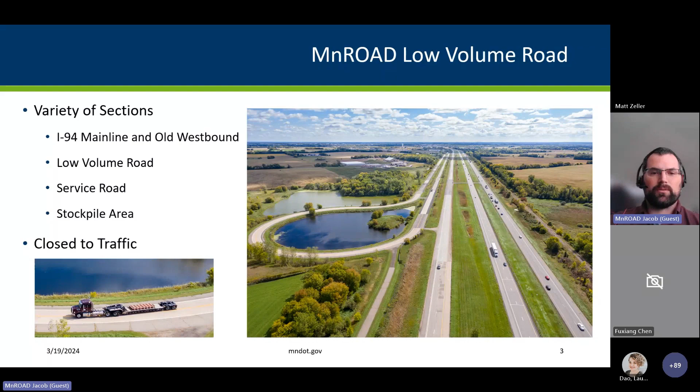The low volume road is trafficked by a single truck, while mainline and old westbound is subject to I-94 traffic. So in order to close it down whenever a participant would show up, we chose the low volume road. Some of the participants could collect while the truck was driving, and some of them preferred that the truck was not doing laps.

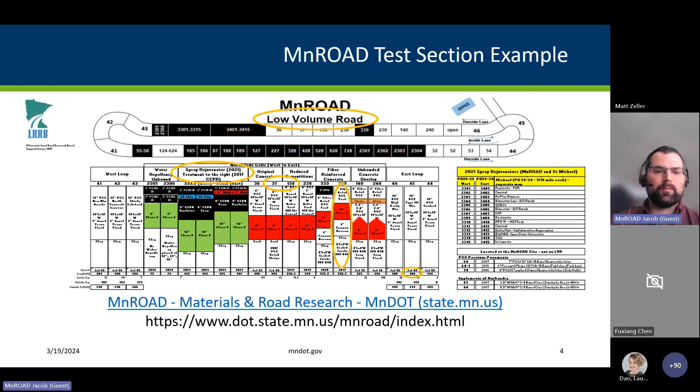Just to give you an example of the test sections that I refer to at MnROAD, the MnROAD website has these section maps available that will show the roadway, the research study, the section number or cell number, the design thickness for that cell, the installation date or modification date, and the length of the cell. And all of this is available at the link below, or if you search MnROAD test sections.

You can also see the test sections here at MnROAD. They are available on our YouTube channel, if you look for the tag at MnROAD Research. We have several years of videos archived, and we'll continue to add more annually and biannually, depending on the test sections.

We do collect manual distress surveys, which we kind of draw out on these manual distress maps. And while last month's Research Pays Off discussed a lot of the data collection that is performed at MnROAD, this time we're going to go into more detail on these manual distress maps and the rest of the automated distress collection that is performed here.

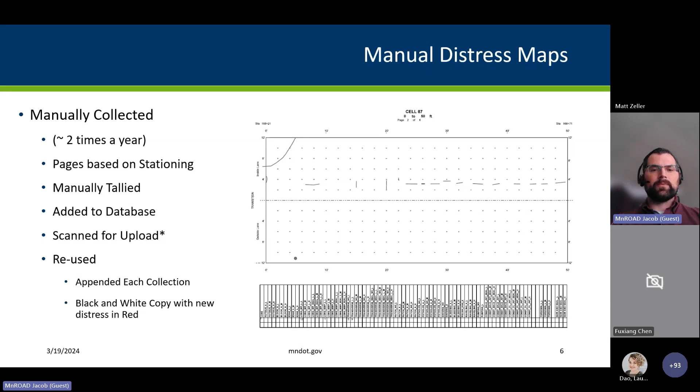But basically, we have people taking a lot of time walking and rewalking these sections to identify any new distress that then gets appended onto the old tally. The tallies on some of these sheets are added to the bottom. And when I mention these tallies and database, this is the list of database entries.

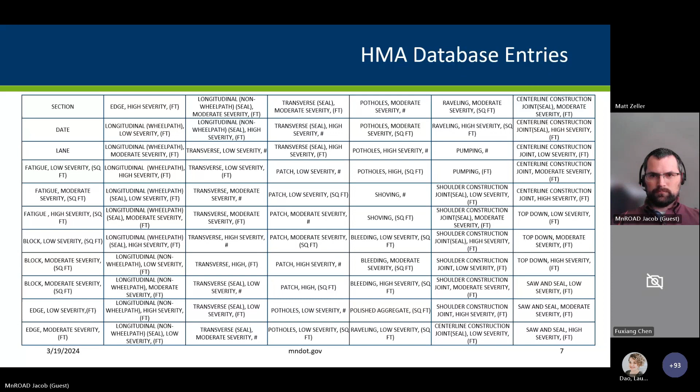In this case, it is the HMA database entries, where it covers the different types of distresses that we see, the levels and severities of those distresses, and tabulates them by either their number, area, or length, and sometimes both. We do separate out our sections based off of lane, so there is an indication as to which lane the collection is taking place. We have a similar database for PCC, or Portland cement concrete sections.

Additionally, we do collect automated distress. MnROAD has some experience with automated pavement distress surveys. MnROAD operates one of the same vans that's used by MnDOT Pavement Management, that they use to rate all of the state and local highways throughout Minnesota. And as pavement management replaces vehicles in their fleet, we're given the option to possibly upgrade our van by receiving one of their retired vehicles.

MnROAD then uses these vans primarily to collect ride and rutting information that is added to our database. In addition to adding this to our database, it allows us to collect data the same way that pavement management is producing data, and we are able to analyze it in similar methods to hopefully get a correlation. Previously, the vans had macro texture lasers, and it's no longer included on our current van. We primarily use these vans to collect ride and rutting information that is also added to our database.

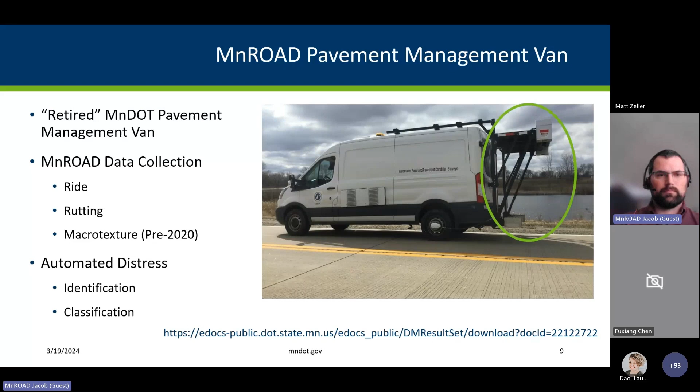After collection, the data processor is able to use the forward-facing perspective camera, the angled shoulder-facing camera, as well as GPS coordinates to determine the location of the van in the collection. The van also measures distance while in motion to provide stationing. The lower lasers on the van calculate the ride for both wheel paths, and the upper lasers and 3D camera provide line scans that can produce these transverse and longitudinal profile information.

For distress identification, we're most interested in the center of this data array that shows the 3D laser scans. A 3D camera collects the intensity of reflected laser and the length of the time the laser traveled. This timing can be used to calculate the height of the roadway at that laser point. These scans can then also be used to identify distress in the pavement.

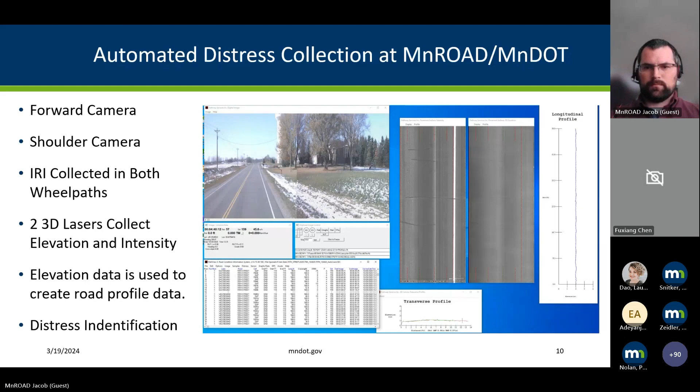There we go. So when you focus on that intensity and height line scans, the changes in intensity allow us to see the changes in the pavement surface. Most notably, the paint lines can be seen, and here the sealed cracks as shown in this image. Distress data is then identified by software and further classified into distress boxes shown above. And you can turn on and off the distress boxes.

So in this image of height, I have added the distress boxes. In there, you can see the pink distress that's inside some of those boxes, and then the classification gets color coded. And here it's blue and green for transverse and longitudinal. It will also change the severity as well.

And at this point, I want to give a resolution disclaimer that will cover all of the previous and additional slides. The resolution that is produced by this particular software, as well as the software from our Rodeo participants, is not possible to reproduce for an online presentation. For instance, the scans shown above are set to display 50 feet of pavement to match our distress surveys.

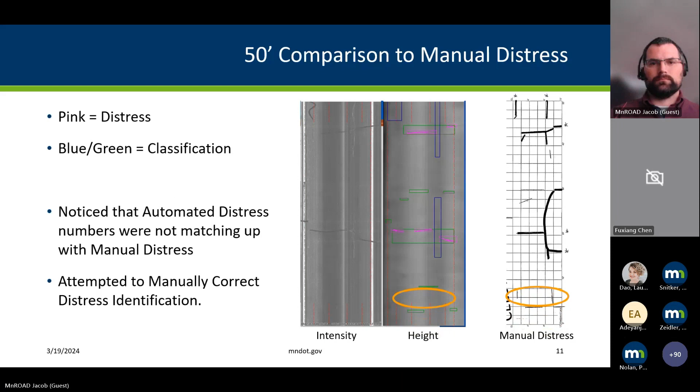It's worth noting that we also have issues with resolution on our manual distress maps as well. As I previously mentioned, we were creating a copy of a copy, and occasionally the maps would need to be updated in order to clean up that created noise. But even as such, we could still end up with some pretty messy outcomes.

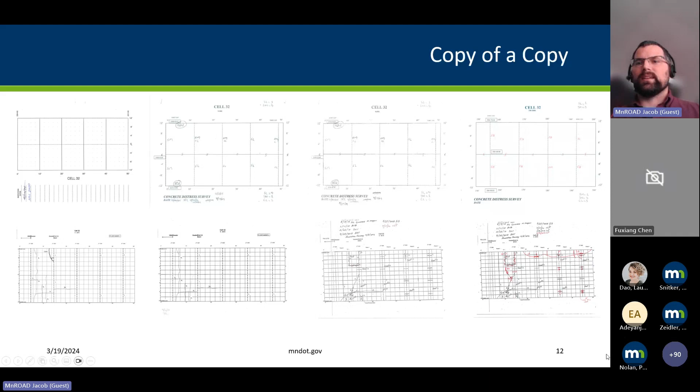This worked well for the person rating the cell because they were able to kind of read their own handwriting, and were able to create the tallies, but they don't present well to an outside audience. So if someone is asking us for distress surveys, we'd like to get things cleaned up a little bit more on our end as well. So we saw a need for improvements in both our manual and automated distress technologies.

So we were trying to look at how can new technologies be utilized to improve or replace manual distress surveys. Looking to focus on field data collection and data processing, where MnROAD would supply the test sections, a distress data format, and an online platform for participants to share data. MnROAD would provide a summary of the different collection methods with the goal of providing details that would allow future users to decide which techniques would be most suited to their needs.

This is where again, I have to be careful when I say improving or making things better, in that for some people, their need may be along our lines where we're looking at research. So those minor cracks are very important for us to keep a full picture of what's going on in the pavements. But when you're trying to collect the entire state and you need to process all of this data in a timely fashion, you may not be interested in seeing all of the small cracks.

So depending on what you're looking at, you may believe one thing is better than another. So we aren't really trying to say which one is better, but just say kind of the differences that we noticed in these techniques.

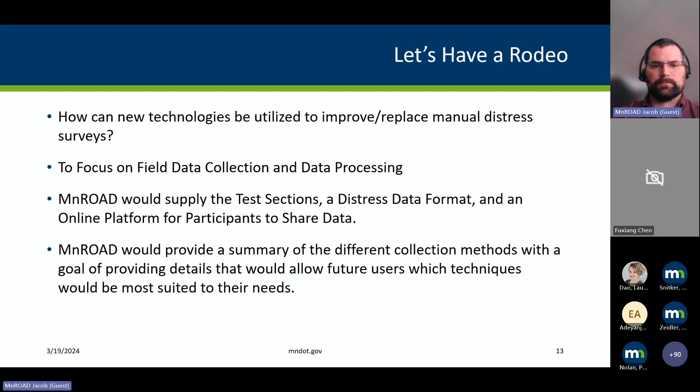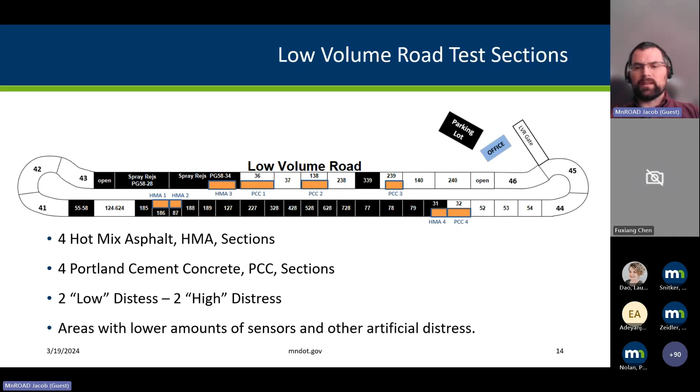So 8 sections were chosen from the low volume road, 4 hot mix asphalt or HMA sections, and 4 Portland cement concrete or PCC sections. Each of these 4 sections would have 2 relatively low distress and 2 relatively high amounts of distress. Additionally, sections would be chosen or truncated to allow for lower amounts of sensors, forensic core holes, and other artificial distresses that can be caused on research sections. One lane was chosen and is highlighted in the graph above.

Our distress surveys generally include both lanes, but for the next slides, I've trimmed them down to the lane that was used for the rodeo, and included blue arrows to show the direction of traffic. Just to give you a quick overview of these sections. And to assist in collection, you'll notice that we do have 2-foot grid line squares included. Crosshairs were used to prevent that, if you saw on the previous slides, the grid lines that we try and use tend to darken over time as we scan and rescan. Stationing is included at the top or bottom of the drawing, with a scale of every 10 feet.

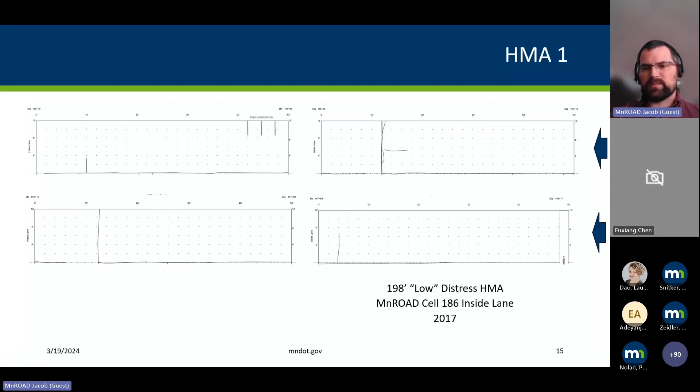This is HMA1, which is 198 feet of low distress HMA that was installed in 2017. HMA2 has a higher amount of distress. That was 225 feet of hot mix asphalt that was installed in 2008. And here's where we can start to see some of that fine cracking that we're looking for with the fatigue cracking and raveling.

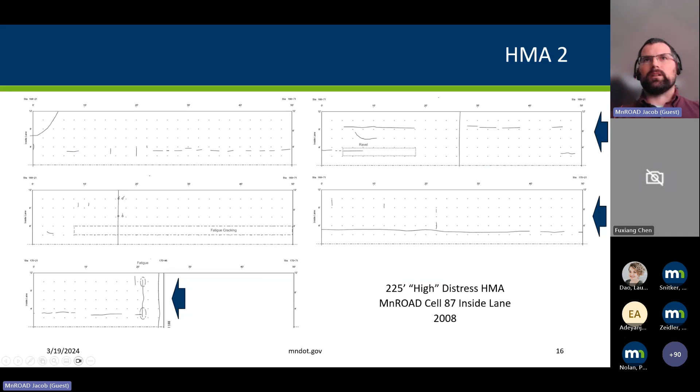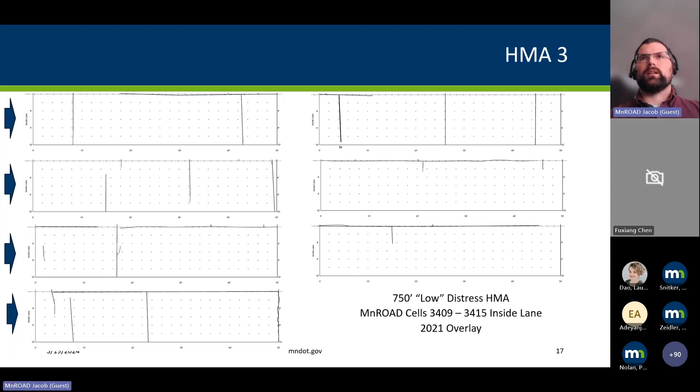HMA3 was another low distress HMA where this was a 2021 overlay. Most of the distress we're seeing is just reflective cracking. HMA4 is a high distress cell, 300 feet of highly distressed HMA that was actually replaced at the end of last year, due more to the inside lane, which is the more trafficked lane, really needed to be replaced.

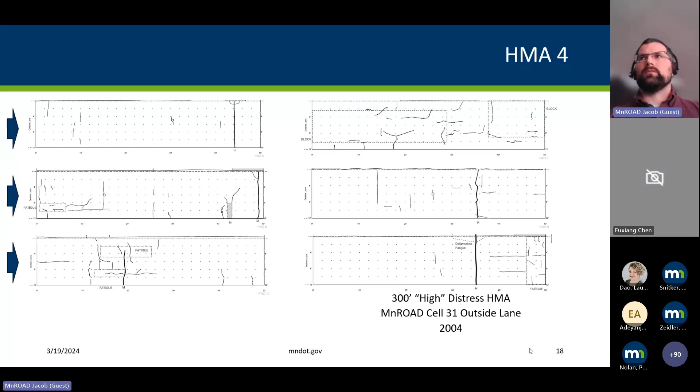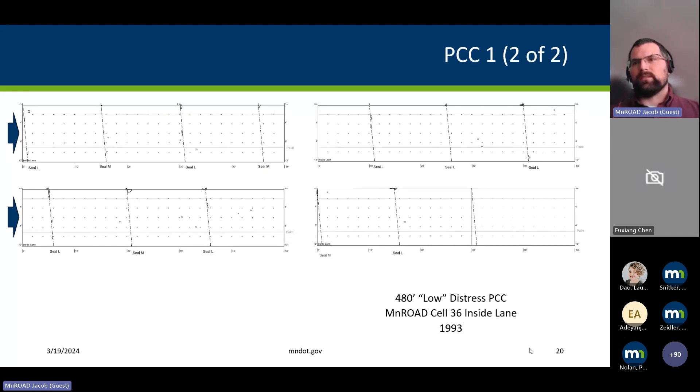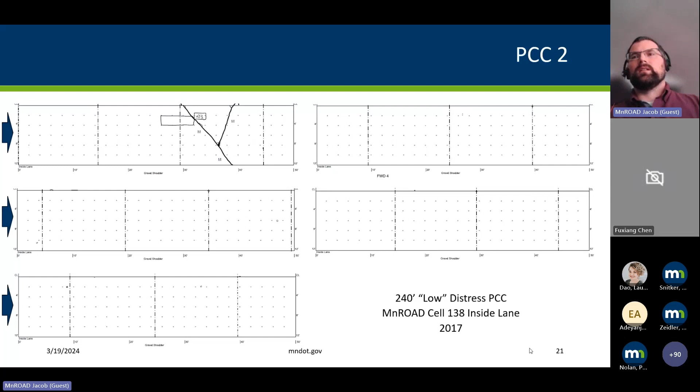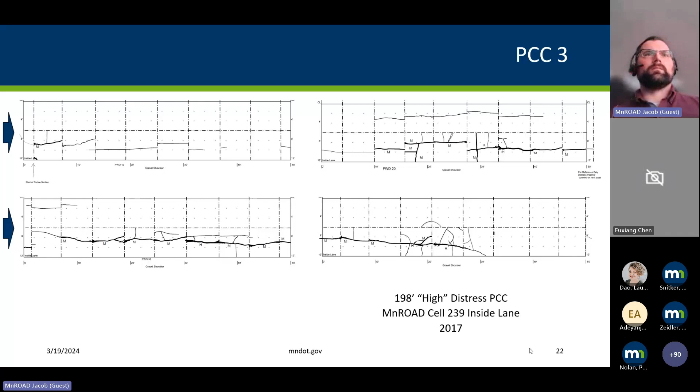PCC1, this is just one of 2. Again, there's 50-foot sections, so we need a lot more distress pages for 480 feet of kind of a low distress PCC, which was installed in 1993. PCC2 was 240 feet of low distressed PCC, installed in 2017. PCC3, 198 feet of more highly distressed concrete, installed in 2017. And PCC4 is more highly distressed concrete installed in 2000.

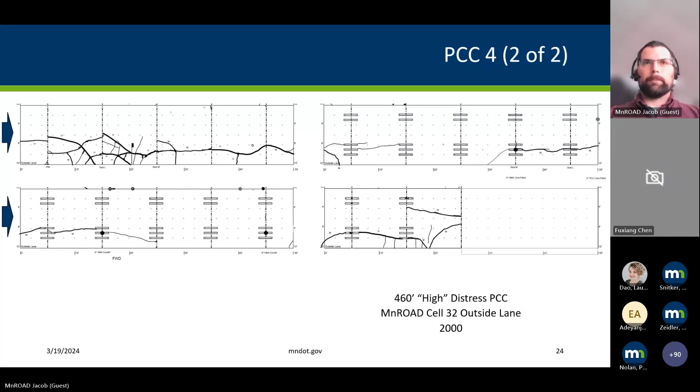And you may notice, especially in PCC1 and PCC4, that there's a significant amount of sensors and forensic cores that had been added over time. And while we tried to avoid this as much as possible, they're very common features at MnROAD, and it's almost impossible to entirely avoid a lot of these additional adaptations that have been made over time.

So the participants for the rodeo, we were from MnROAD, we were going to include the manual distress maps that we have created. We would provide collections from our MnROAD high-speed profiler. I say Pathway Services is the van that created that. They produced the software, but it was all internal processing that was done of both the collection and the data. MnDOT Aeronautics agreed to bring out their drone and do a LiDAR collection. We had Terracon and Pave AI come out and try out their equipment.

Transconomy, and we had saved data from the Australian Road Research Board's Intelligent Pavement Assessment Vehicle. They did not participate in the rodeo, but we were able to kind of go back and spot check some of their stuff. Unfortunately, we were unable to work out the timing for automated drone flights. We were hoping to get some collection done there, but it didn't quite work out with our schedule and the participant schedule. We attempted to make our own collections with a GoPro and a newer 3D collection system from Pathway Services, but we weren't successful in those efforts.

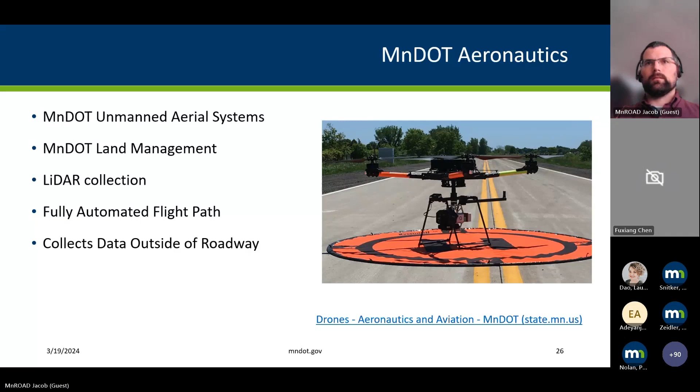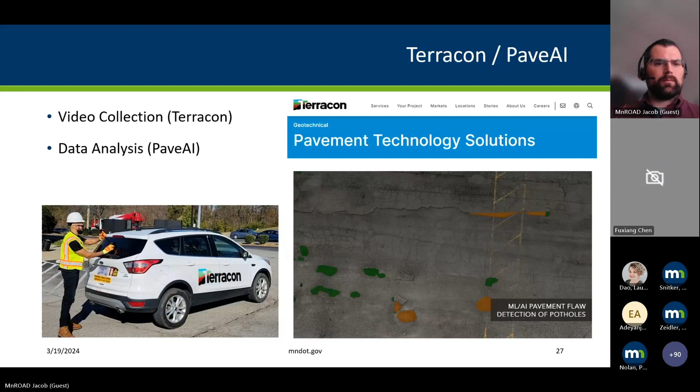Put it this way. Terracon, Pave AI, their video collection is basically a unit hooked up to an SUV really and is connected to Pave AI, where they're able to upload the data from the vehicle, from a cell phone in the vehicle to Pave AI. Pave AI performs the data analysis.

Transconomy, similar SUV vehicle where they're collecting data from video devices on the front and back, and it looks like a 360 camera on the top of the vehicle. Transconomy, if you go to their website, it appears they do a lot more with some of the pavement management and asset management. So a lot of the times these vehicles are used to collect information on road signs and things on the shoulder, but they are using their machine learning computer vision technology to test out what they can do on pavements.

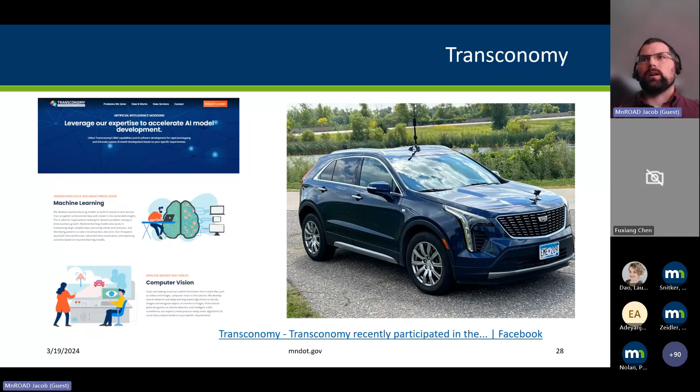As I mentioned, ARRB's traffic speed deflectometer was out here in 2019 and 2020. Their data was still accessible on Hawkeye Insight. And so we were able to look at some of the older distress maps that we had and kind of just do a quick comparison. This is predominantly used for state road authorities and has been used on some government networks too.

This unit that you see here, iPAV vehicles can also be used to measure roughness, texture, rutting, digital imagery for visual rating, and automated cracking. So this is one of the larger units primarily used as a traffic speed deflectometer that they've added all these additional things onto.

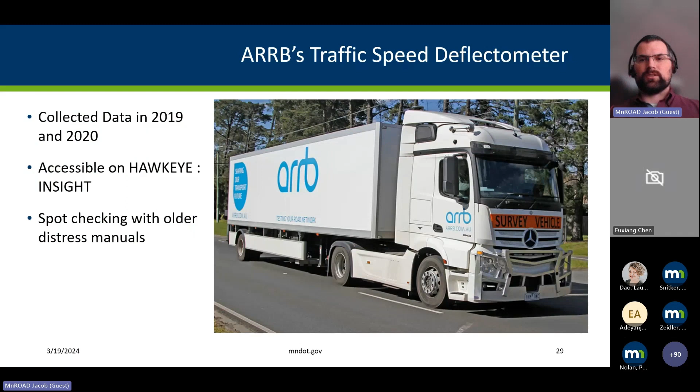So getting into some of the information that was produced, unfortunately, with MnDOT Aeronautics, our first data collection was not performed at the highest resolution. It was probably a miscommunication on my part, where this is new to them. They do a very minimal amount of roadway distress collection. So for them, this was as much of a learning experience as it was for us. And so they could have performed the distress, but they really wanted to get a higher resolution imaging.

So data was recollected in December, and we still need to work on processing that. We hope to get that processed just to see how their algorithm works and then to see whether we can make that data available to others in the future.

They were able to provide us TIFF files that can be brought into Google Earth. And so that's one of the ones that you see here, where they're able to give us these resolution photos. And again, because of the resolution, I'm not certain how high resolution it can get. You can see some of the cracks if you kind of zoom in on that overlay, but we're really going to focus on narrowing that down to see how high of resolution we can get.

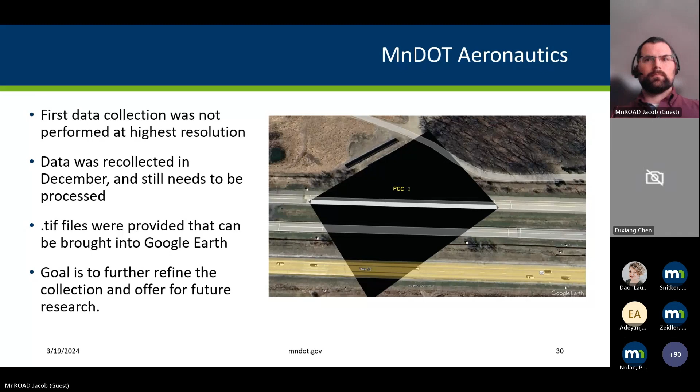Again, Pave AI. They actually came out here 3 different collection dates. They did a full loop back in late 2022 just to demo their product and process, and we invited them to come back and participate in the rodeo. And we were hoping to get kind of 2 different collections from each of the providers just to see how repeatable their process was, but that didn't always happen. But Terracon was great to provide us with at least one section that was repeated twice.

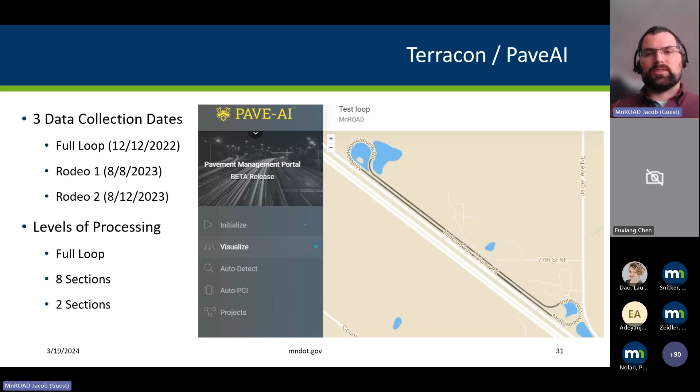And so in those different data collections, there was a different level of processing. The first time they processed the entire loop. Second time they only processed those eight sections for the rodeo, and the third time around they just did 2 sections just to show the repeatability.

Now, generally, this product is marketed at a project level. It's used primarily, my understanding, by Terracon for parking lots, where they are producing a pavement condition index that they can then visually display over these orthomosaics. It's not currently set up to output database entries, and they are currently including some manual identification in the process.

They were basically pitching this as a possibility for us to explore. This isn't their normal market. They aren't normally doing roadways, but they were very generous to try out their product and kind of show us what they could do as far as presentation and identification. However, because that gave things in a PCI rating, or a pavement condition index, we weren't able to really compare that as well to our database entries.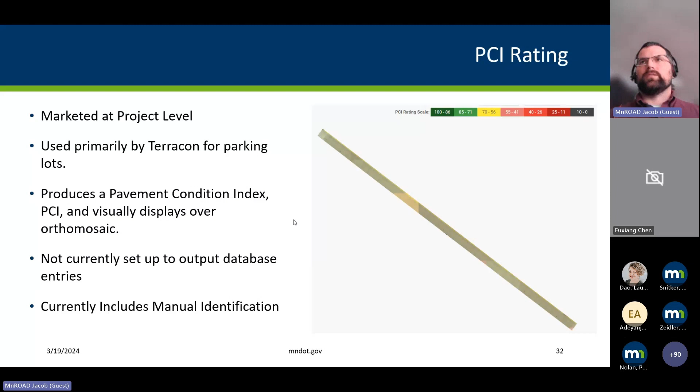So this was a learning process for me where I basically looked at how, like I said, pavement management van were able to somewhat reproduce what pavement management produces. And I say somewhat, so this is not entirely what pavement management does. They produce a lot of things, and I'm only touching on one.

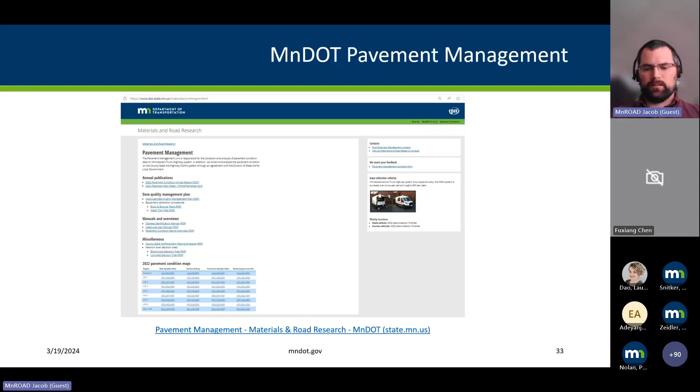But one of the things that they do, and you can see the rest of what they do on this link here, is produce a surface rating, where they're looking at the distresses measured. They're taking those distresses, weighting them by multiplying by a weighting factor, adding it all together, and then using this calculation to perform a surface rating.

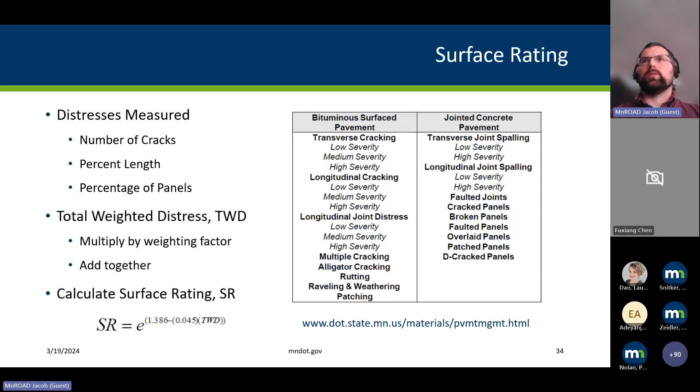And then I added our surface rating that we can approximate from our manual distress data. We can only approximate it because we don't do all of the measurements specifically. We aren't out there calculating rutting, but we can enter in what we have. There's also a few changes in how they calculate things where for concrete they're using number of panels, and so getting percentages based off of that, which isn't always something we have in our database, but we can go back and relook.

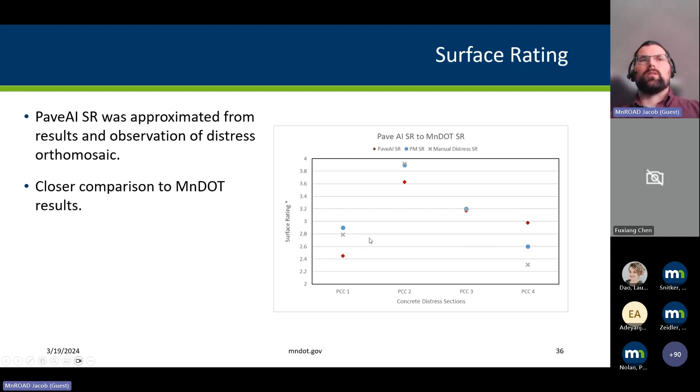And because they are calculated, basically that PCI rating, or actually the surface rating, was highly weighted towards spalling. And so when we put PAVE AI's information and again get that similar approximation, we're able to reweight that spalling, and you can kind of see that PAVE AI was able to more closely match the MnDOT results.

One thing I forgot to mention on this slide was we were happy with PAVE AI, where they were able to get the trends, where we kind of expected to see higher PCI ratings for HMA 1 and/or 2 and 3, and lower PCI ratings for PCC 3 and 4. What kind of surprised us was that low rating for PCC 1, which occurred in our surface rating, but did not occur in their pavement condition index.

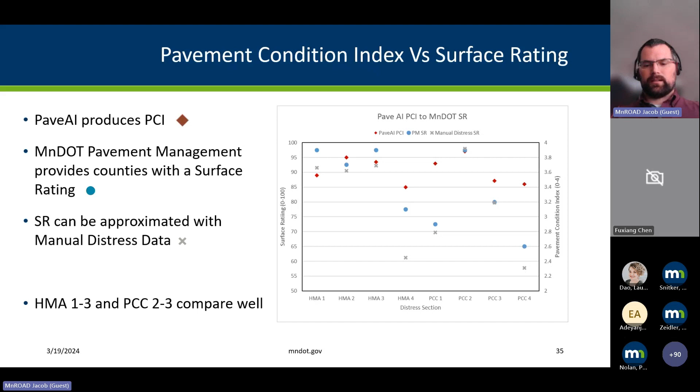And we're kind of wondering that HMA 4 had a little bit of difficulty. We wanted to look into that a little bit more closely. So after looking at the surface rating, we did look into some of the presentation, and as you saw before, PAVE AI was able to present this data really well. You saw the orthomosaic that included the entire low volume road. And in that, you're able to zoom in.

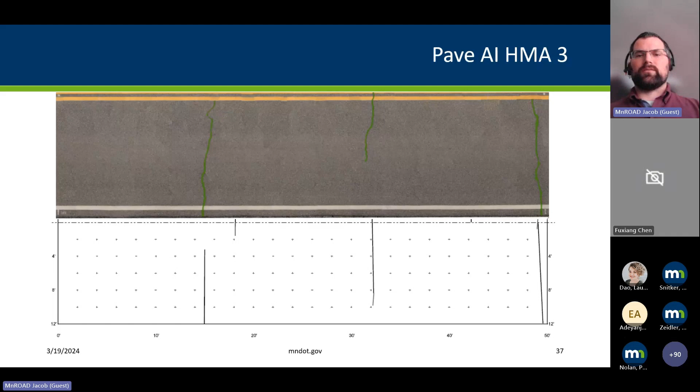So here you're able to kind of see and zoom in, and you're able to see the distresses that they labeled. And some places they had a little bit of discrepancies between what they labeled and what we labeled. But in some cases the presentation is better than our distress surveys, or more true to the actual crack than our distress surveys, which is kind of shown here for HMA3.

However, when they did their collection, the road was definitely dirtier, and so that also can affect how our van will be able to collect the data. And so we do get some days where we're able to see more cracks than others. As it turns out, in discussions with PAVE AI, on this particular collection day they had an issue with one of the passes. They do multiple passes on the roadway, and the one on the shoulder had a little bit of difficulty, and so they weren't able to get as high of resolution as they wished. So that was one other issue that they had.

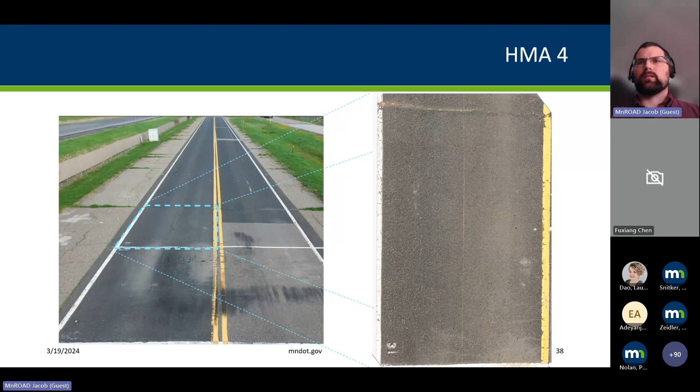And so here I just show you those collection conditions, between adding a second run and just having a better day to collect. The collection on the right, you can see it would be a great day for doing manual distress surveys because there was some moisture inside of the road, but not on the surface. And so a lot of those cracks really pop out. And in addition, PAVE AI had an additional scan on here, so they were able to produce higher resolution images. That being said, I think if they had rated HMA4 on their second collection instead of their first collection, they would have had a closer outcome.

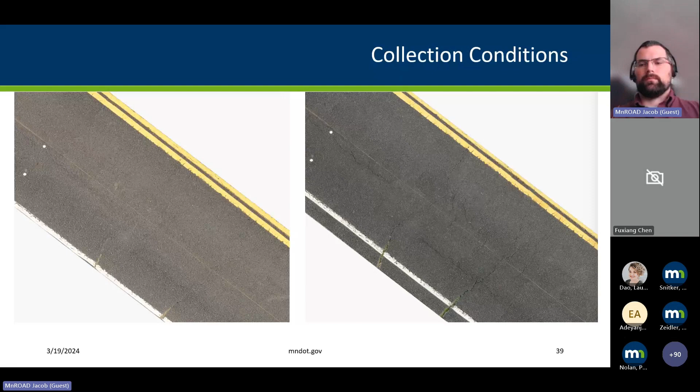Just again to highlight some of the benefits of their system compared to our manual distress maps. Here you can see the highlighted distresses, and you can see kind of my drawing down at the bottom. And some of their cracks show a truer representation of the cracks. What they also do well is it's a photograph, so you're able to see those paint numbers that we put on the roadway, and they did a very good job of not picking those up as noise.

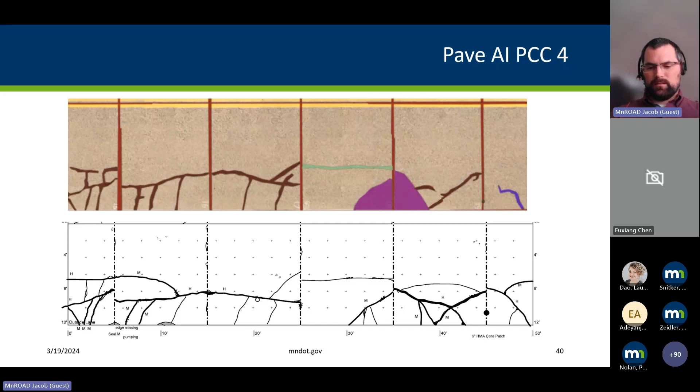Sometimes the automated distress systems can pick up those additional markings we have on the road and try and classify them as distress, which is another reason why we wanted to do this rodeo, was to improve that technology. You can see there's a few things where some of their joints, the stitching of the orthomosaic, again, probably will be improved in the future, but we're very happy with the steps that they're making in that regard.

Moving on to Transconomy, again, they had another similar vehicle with the videos on the front and the back. I was not able to see their distress output other than they very kindly sent us their database. So in this case, I was able to make more of a comparison between the two.

And here, just rather than going into all of the details with the numbers, because I still need to work with these a little bit more myself, you can really see that there's lower detection in these distress sections 1 and 3. So when I kind of remove most of the null, you can just see there are more detections in 2 and 4, fewer detections in 1 and 3, and you can kind of start to compare those numbers.

They compare very well to the pavement management van and the manual distress survey. So here you can see Transconomy on the left, the pavement management van is in the middle, and manual is to the right for all four of the HMA sections.

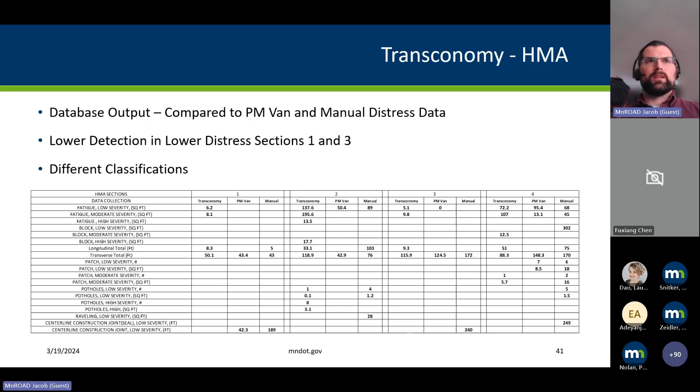A few things that we did notice, that Transconomy and our pavement management van had, and honestly, we had some discussion with our manual distress surveys, is when we are only rating one side of the road, what happens to the center line joint. And so here you can see the picture when that center line joint is on the right hand side of the road, and we're rating the left hand side of the road. Where do those distresses count?

And so this can be one of the things that really kind of needs to be solved with firm distinctions in where you are rating, and how you are rating, which is some of the discussions we will have. But then also distresses can be missed. If that line detection is picking up the edge of the cell on the inside of the line, you may never see those joints.

Wheel wander. If the vehicle moves over too far, it won't pick up those center line joints, and also it can be masked by cracked paint. They aren't always easy to see, especially at low severity, which is again one of the things we're trying to pick up, really these low severity cracks that may or may not be an issue, but we want to be able to count them.

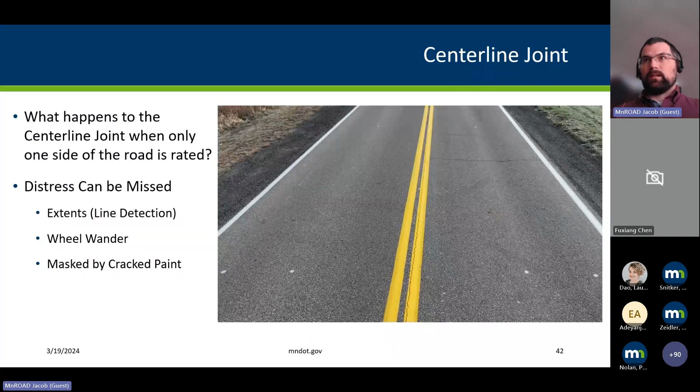And so I was able to graph a little bit of the results. So here you see Transconomy, where I was graphing the number of cracks with the length of cracks and really comparing their sections with the manual distress surveys. And there's a few discrepancies we can kind of see in PCC sections 1 and 2, which may have been more of a classification thing where I classified these small cracks as block cracking, and they appear to have labeled them as longitudinal cracks.

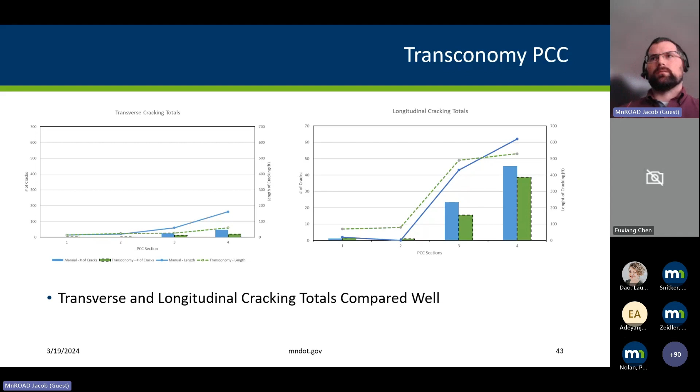Again, here we see where I removed the null just to show the quality rather than quantification, I guess, where you're really looking at here's the low distress, and you definitely see it's picking up a lot less distress than the higher distress sections.

One of the things we noticed, skipping ahead a little bit, pop outs, where these automated distress systems, this is one of the things where we can say, hey, these things are much better at identifying and quantifying, because as you can see there are 219 pop outs, where we just don't have the time to count all the pop outs. So for me, I would just say, hey, there's 8 panels with pop outs in them, but they're able to actually pick out a lot of those pop outs, where I can't even, well, I could, if I spent a lot of time, kind of check their math on that.

Still, some of the issues we're seeing are these transverse joint seals, with both the van and Transconomy. I think Pave AI as well, where maybe the sections need to be labeled better, whether they're sealed or not sealed, but we are having some difficulty picking up those. I know when I'm adjusting them, it's really difficult to see on the screen where seals are having distress. Transverse spalling, also one of the issues that we're looking at hopefully improving in the future.

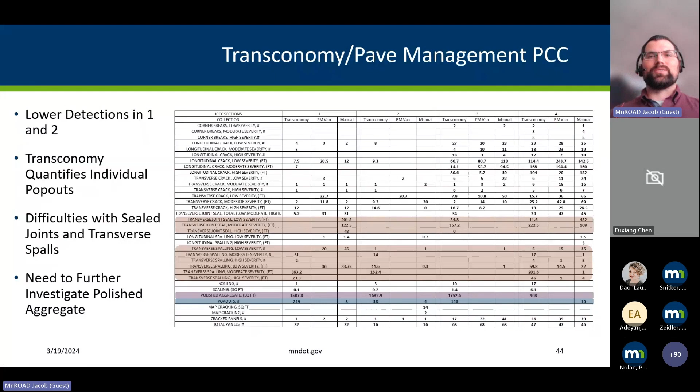And they were able to pick up a lot more polished aggregate, which I still need to further investigate. I know PCC4 had been ground, and so there was a lot of exposed aggregate, but I'm not certain that there was the traditional polished aggregate. But definitely they're picking up on that a lot better than I did with my manual distress survey. So that's one of the things I still need to check into.

Here we'll just give you a quick overview of ARRB's traffic speed deflectometer. Again, wonderful presentation of the data, where here you can see the Hawkeye Insight web portal allows you to see the vehicle's location, the different camera angles, and the cracking data. Very similar to what we're seeing with the Pathway van.

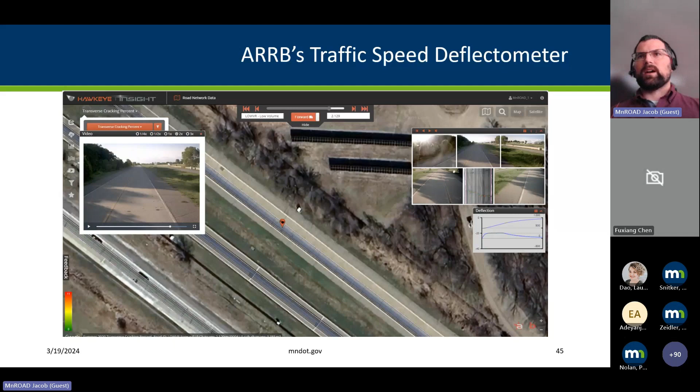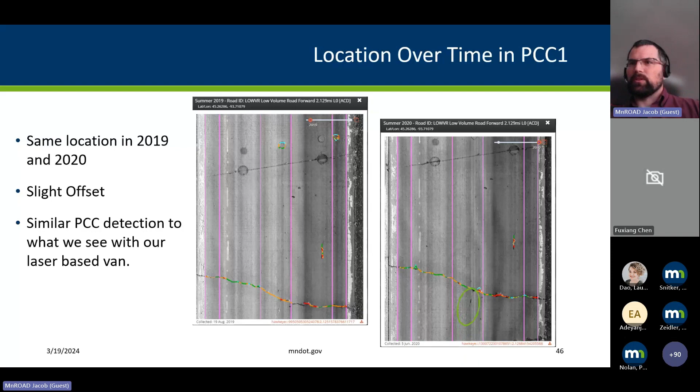What's great about this is you're able to move that slider seen on the previous screen, and it shows the cracking data at those points. And then you're able to move this little slider up at the top that allows you to pick the different dates of collection, very similar to Google Earth. There's slight offset, again, very similar to Google Earth, but you're able to see the kind of crack propagation over time. And, at least in my opinion, I'm seeing very similar detection to what we get with our van. Again, we're trying to pick up those low severity cracks.

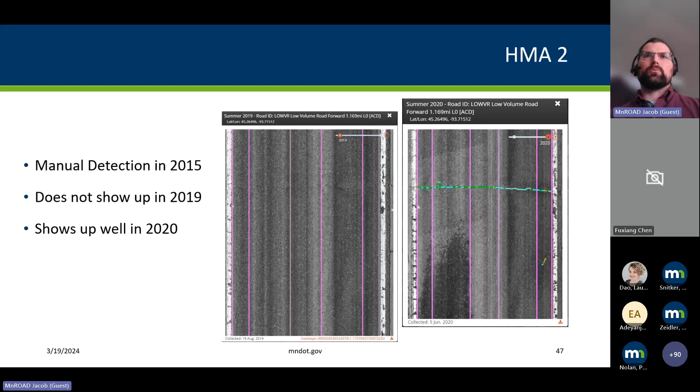Again, just to show you HMA2, trying to improve that crack detection here. We had a crack that we found in our manual distress surveys in 2015. Here it didn't show up in 2019, but they definitely picked it up in 2020.

So just to summarize, manual distress surveys are still the standard that we're going to go off of. However, very good results can be obtained with a variety of collection devices. I mean, you can see this scaled from a

You got muted somehow. All right. There we go. Okay, good. We're back. All right. Now I gotta get my presentation back up.

All right. So, yeah, good results can be had for a variety of costs and effort. And what we see, I didn't describe this much in the presentation, but automation does provide a safer and faster alternative. It is a lot safer to be looking at these cracks from your computer screen than from out on the road. Digital results provide a truer representation, as shown again on the right, where you really see what the crack is as opposed to somebody's rendition of it.

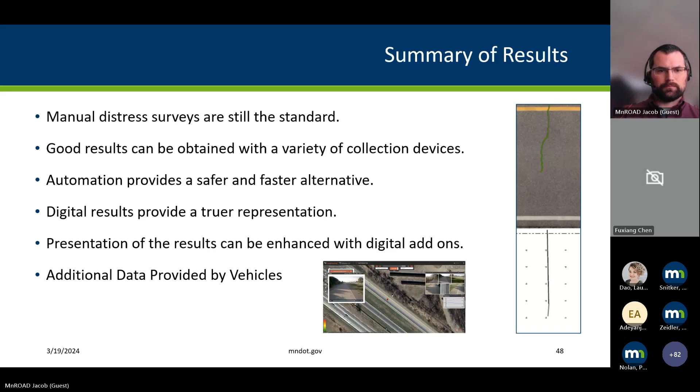Future goals. Again, we're trying to help out wherever we can to improve this resolution, as you can see from the photos on the right. But we're also trying to learn. So how do we tailor our MnROAD data collection? As I mentioned, we're working with aeronautics. How do we produce LiDAR data that other people can use? One of the goals of the distress survey was to get people who just wanted to process the data, not collect it. We didn't have anyone participate in that.

We have had since then requests to use some of the data for similar operations, but our data isn't tailored to their needs. So we're really looking for people who want to process this data to give us advice or to ask us, hey, can you have your drone or your vehicle or your GoPro do this, so that we can produce that data, save that data, and share it with whoever wants to use it.

We do want to try and work on this automated drone collection, so we can have that capability to really do more of the project level, so the smaller areas, higher resolution. We're working on that LiDAR collection and processing. And again, as I said, increased participation. So we'd love people to come and help us out, and allow us to help them wherever we can.

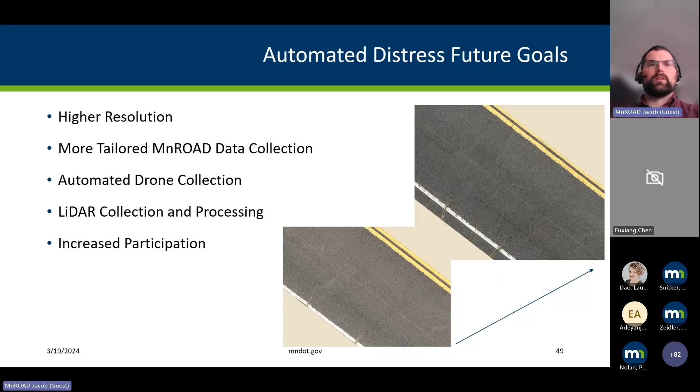Where we see some of the future possibilities is this possibility of quantity over quality, where lower cost, more vehicles, where you might not be getting as great of data, but you are getting more data. This is also kind of decoupling some of the data. So right now we're using a pavement management vehicle that works great for doing the things that pavement management needs it to do, in addition to doing distress surveys.

And so we're wondering if we decouple that, can we get a vehicle that's lower cost, that doesn't need to do all of the pavement management stuff, that can just do distress. And here is just an example of connected vehicles where they're using fleet vehicles, or in some places people are trying to use phone data to really crowdsource ride data.

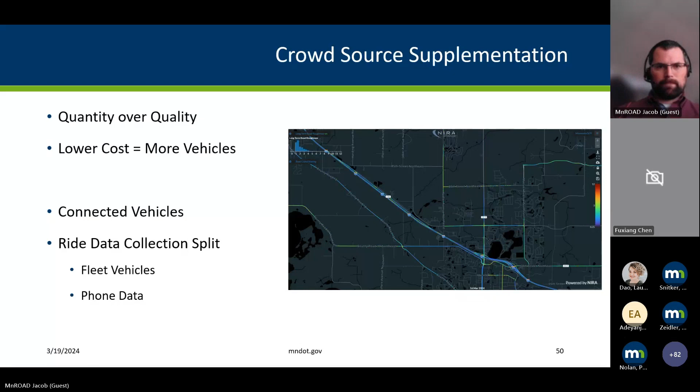And so, in addition to crowdsourcing, there's this cloud sourcing idea, where you're moving from PC computing to cloud computing. One of the nice things about our pathway software is that it fits on a program that we can share with people, so researchers can look at our data from a laptop.

However, as can be attested by Pave AI and Transconomy, they're moving more to these machine learning and AI programs that are able to bring a lot more computing power to this identification. And we really see that as a way to further improve these systems, especially if you're able to collect more data from more vehicles and get it into the hands of these larger computers. So in this case, you'd have more specialized computers than specialized vehicles.

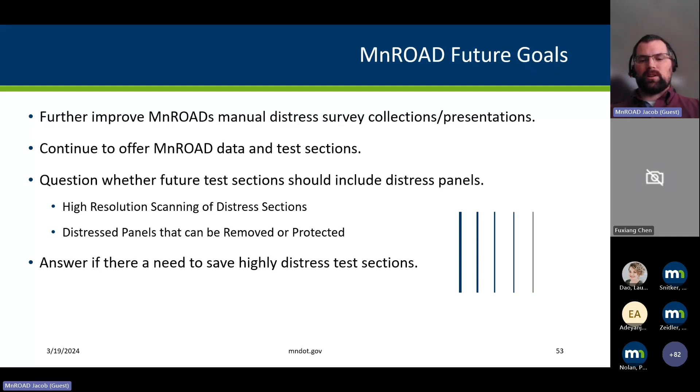Is there a need to additionally save some of the highly distressed test sections? When a section gets old, it needs to be replaced and new research put in. If all of our research starts at the same time, we end up with a whole bunch of really nice concrete sections. And so we're trying to figure out how to maintain a balance of available distresses if people want to come out and try out their products. With that, I will take any questions.

Thanks, Jacob. We do have one question in the chat from Tom. Should we require cleaning of the surface prior to testing MnROAD test sections? I think that's when you were discussing that some of the paint and debris on the road can sometimes alter the results.

Yes, and unfortunately, we tried to clean some of the sections, and as you can see, one of the additional issues we had was what do we do with the grass that's growing? And I actually had some conversations with pavement management. But I was out during the rodeo. I actually started paternity leave a little bit earlier, so we were hoping to be able to sweep these off and get things clean, but we weren't able to coordinate it. However, as you might be able to notice, that section was pumping, so a lot of that stuff was coming up and would be difficult to clean.

Again, if we wanted to be more exact, that's part of that question: would we need to vacuum truck off all of these sections each time someone did it, so everyone has exactly the same test section? We tried to compensate for that by getting everyone to collect at the same time, but schedules didn't really allow that to happen.